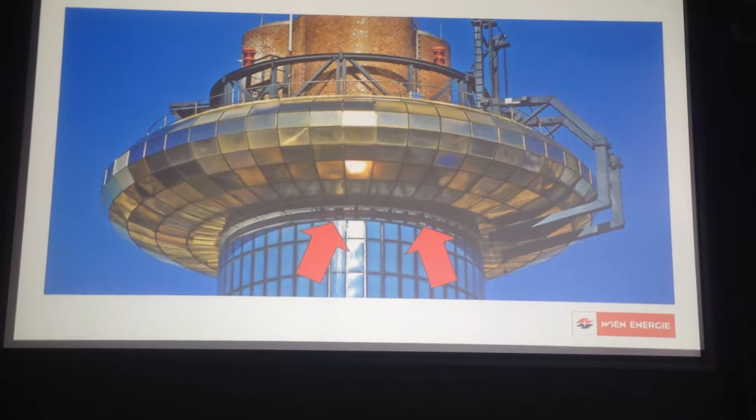We created new buildings, and Hundertwasser told us falcons need red tiles to be happy. Okay, we brought them red tiles to the places where they live. Every year we have one pair of falcons, normally 3 eggs, and also normally 3 young birds.

These falcons are shy birds, and on the days when the trucks are here and it's a little bit louder, they hate it. But early in the morning or late in the afternoon, you can see them flying around our chimney. This picture we took years ago, and one of these 3 birds was very interested in our plant.

He found an open window and flew directly into the plant, looking around at what we're doing, but then he had a problem - he couldn't find the way out. My colleagues working in the plant found the bird and called us: please come over to the plant, take a camera with you, there's a crazy bird in here.

I asked him, crazy bird? Is my boss with you? Not this crazy bird, it's a real crazy bird. It looks like an eagle, but it's too small for eating. We thought they were joking, but we went over to the plant and we found the bird too.

We took some pictures, and then we thought about how to bring the bird out of the plant. He's not allowed to stay in the plant without a helmet, and such a small helmet we didn't have.

A colleague of mine came to the situation, his name's Mr. Winkler, and he's a very brave colleague. He put a leather glove on his hand and brought his hand to the falcon, and the falcon jumped on his hand. I think it's the only falcon in the world which goes with Mr. Winkler to the elevator, and he brings him again up to the roof.

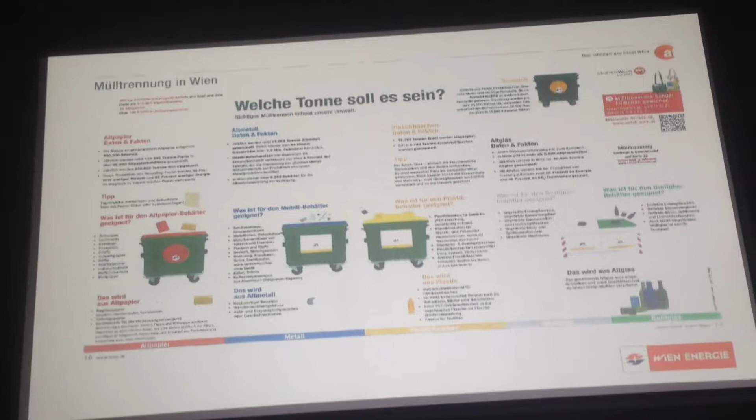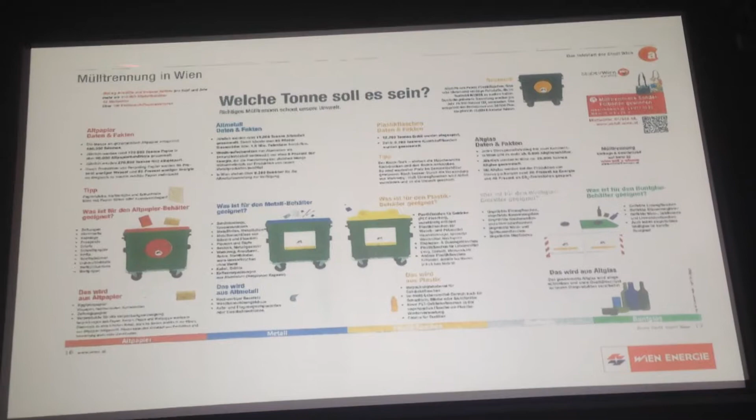Here is the waste separation in Vienna, Mülltrennung. And we also have the so-called Mistplätze. These are very important if you have larger pieces of waste, like an old bathroom or old refrigerator, but also hazardous wastes from households you can bring to these places.

And then we have the third step of waste management in Vienna, and this is what we are doing here: the burning of waste.

This is a view of the place before the bunker, and here you can see a lot of trucks. They're coming Monday to Friday. If there's a holiday, they also have to come on Saturday - up to 220 waste trucks, coming twice a day. First in the morning they wait here, then we open up our 8 doors to drive to the bunker, with 6 tons per truck going to the bunker.

Then they drive again to the city, looking for some fresh waste, coming in the afternoon a second time. The waste is in the bunker. We are going to see this bunker in some minutes.

And now my colleagues, the crane operators, have to do their duty, and they have 3 important things to do. First, they have to bring the waste from the side where it comes from the trucks, with their clamshells, to the other side. Then they have to mix up the waste, and then they have to look for some larger pieces and put them out.

You cannot imagine what we found in here in the bunker. For example, half a cow. But this wasn't the largest thing. The largest thing we ever found in here was a whole VW Beetle. It did not come with a truck - it's too big for a truck.

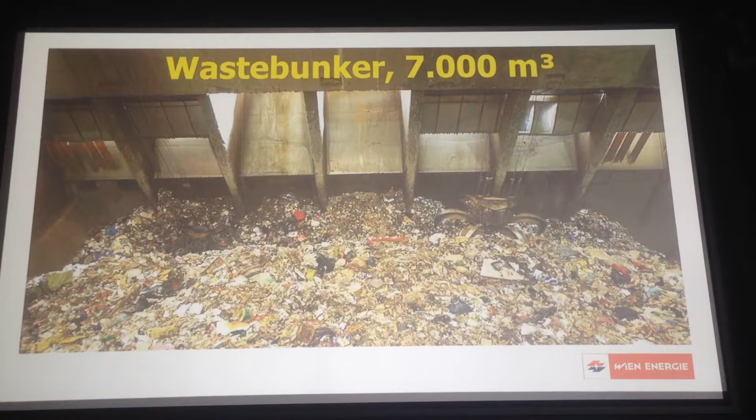But we have many big companies in our city. They have a lot of waste and buy big containers. The women who clean the office buildings throw the waste bags into the containers. Nobody knew that under the waste bags was a whole car - rather big. But this was the largest thing we ever found in here, and we've burned waste here since the year 1971 - 47 years.

The third thing he has to do: he has to fill up the filling hoppers. Every 10 to 15 minutes he brings up to 3 tons of waste with the clamshell into one of the two filling hoppers. Here we can see the whole system.

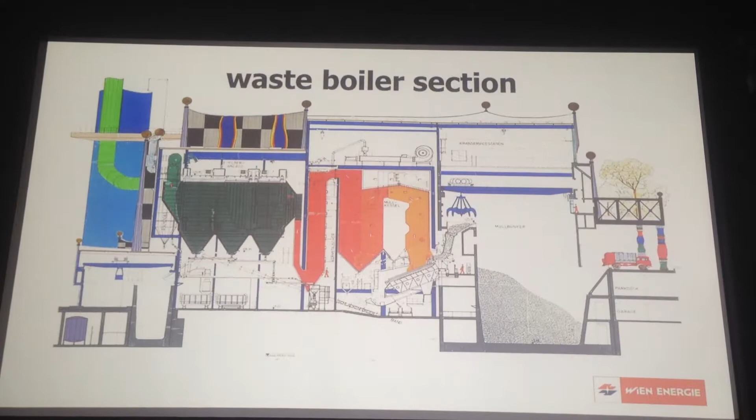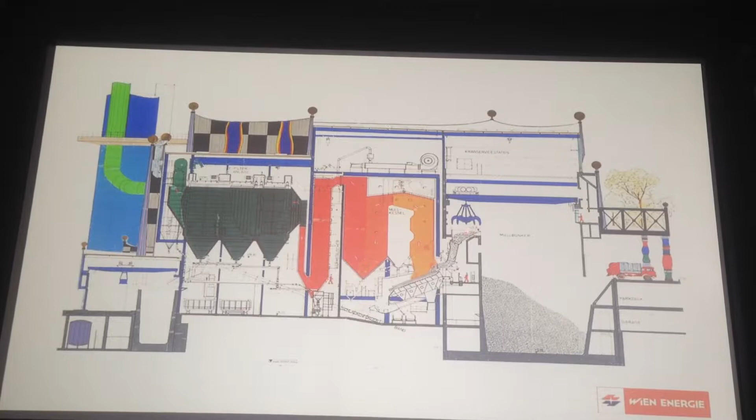The trucks are stopping here. Here is a border of concrete, so they cannot fill in past it. They bring the waste here in the bunker. The crane operator comes with the clamshell, brings it from this side to the other side. It's going to mix it up, looking for some larger pieces, and then fill up the feeding hopper. From this place, it goes very, very slowly to the grate.

The grate is as big as the seats here, and here we are going to burn the waste at a temperature of about 850 to a maximum of 1,200 degrees Celsius. It's not necessary to add things like gas or oil, but we need air - we have to blow some air under the flames to let them rise.

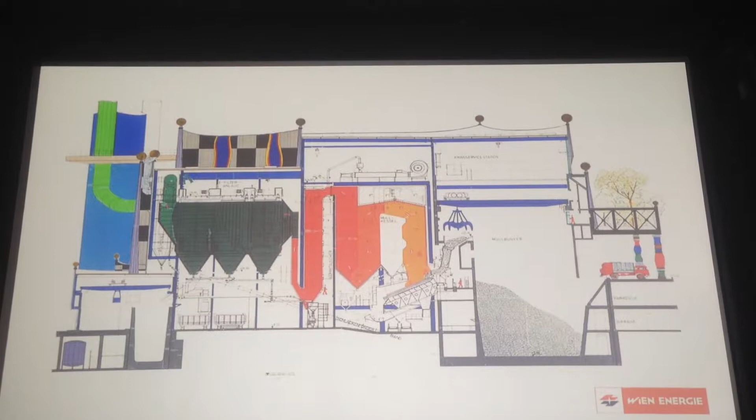And we took this air from the bunker. Why from the bunker? Because the air in here is dirty. If waste sits here up to 2 weeks before we burn it - maybe 1-2 weeks in the bin in the flat, maybe 1-2 weeks in the bin in the house, it might be 5-6 weeks total - it doesn't smell very good.

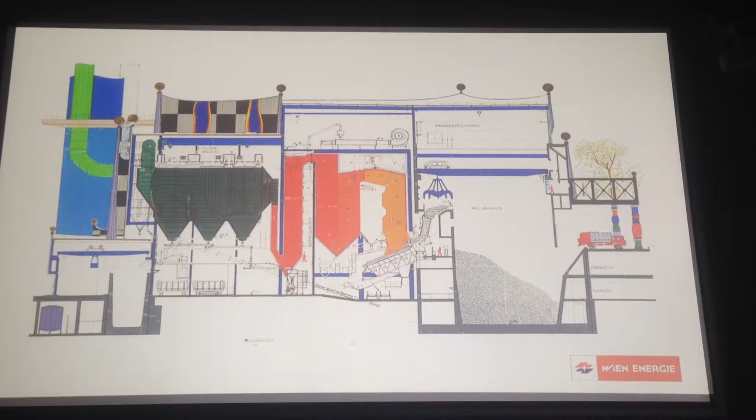And our plant is directly in the center of Vienna, with thousands of people living, working, and studying around us, so we have to work very clean. We bring this dirty air out of the bunker, blow it under the flames to let them rise, and then we can clean this dirty air with our flue gas cleaner. We also close the doors of the bunker when there are no more trucks coming, so that no dirty air escapes.

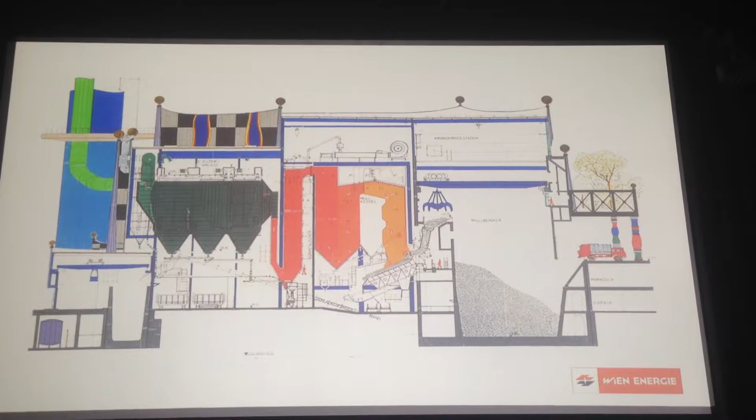The next step is the flue gas cleaning, but I will show you that over there in the plant. At the end of this short presentation, let's have a look at the district heating system in Vienna.

District heating is hot water, up to 150-degree hot water. We need this hot water for about 370,000 flats and about 7,000 bigger customers. We have a market share of about 36%, so more than a third of the Viennese people have district heating.

Where does it come from? It comes from Spittelau. We renewed our plant between 2012 and 2015. After 40 years of burning waste, it was necessary. At the end of the tour, we'll tell you something about this construction site. Now we are finished, and now we can burn again.

250,000 tons of waste per year. This is approximately a third of the Viennese household waste. Then we have here the old Flötzersteig, the oldest waste incineration plant in Austria. It's a little bit smaller, they burn about 200,000 tons per year.

Then we have here the Pfaffenau. It's about 9 years old, as big as our Spittelau. Beside another very important plant, the so-called Simmeringer Haide, where we burn hazardous waste from all over Austria.

In spring, summer, and autumn, this is enough energy. We have to shower hot and wash the dishes, but we don't have to heat. In winter, it's not enough energy. We have to heat our houses and flats, and we also turn on the bigger plants of Wien Energie, especially Simmering.

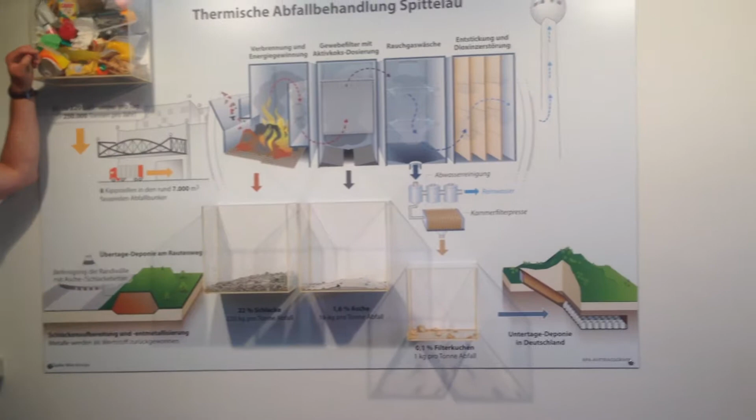Okay, group is complete? Yeah.

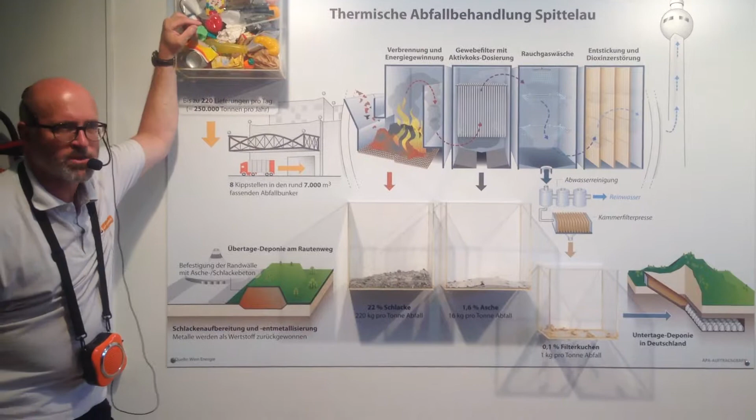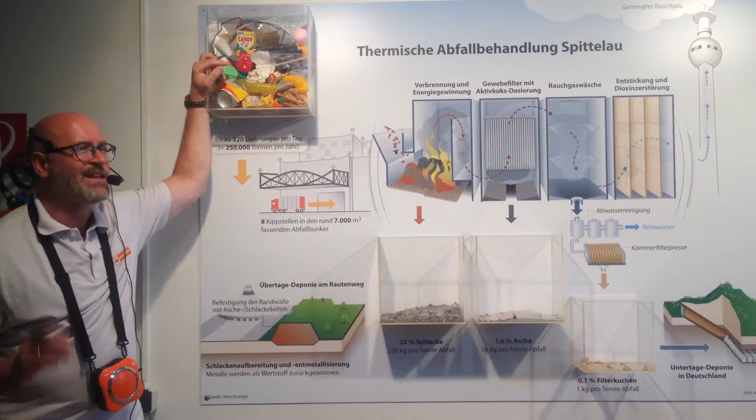This is the Viennese waste. Most people in Vienna separate their waste, but we also have some black sheep who don't do it - what a pity. Glass, metal, paper, and plastic bottles end up in household waste. We have no possibility here to separate it, and it's not our job - this is the job of the Viennese people to do.

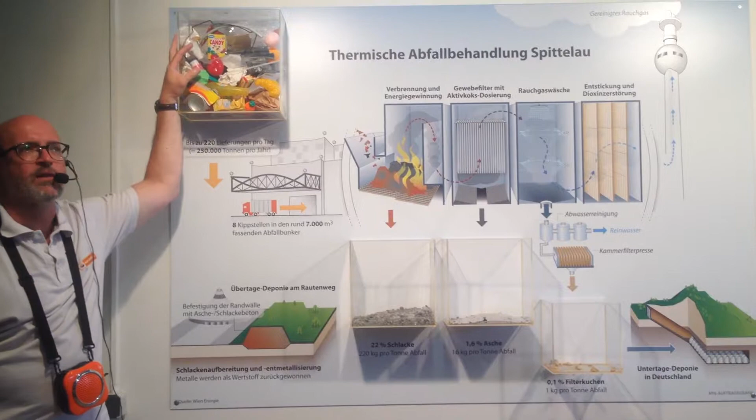And there is a lot of food in the waste. This is not a problem just in Vienna, this is a worldwide problem. Do you know that one third of the worldwide production of food goes to waste? One third - millions of tons! Oh my God, I cannot believe it.

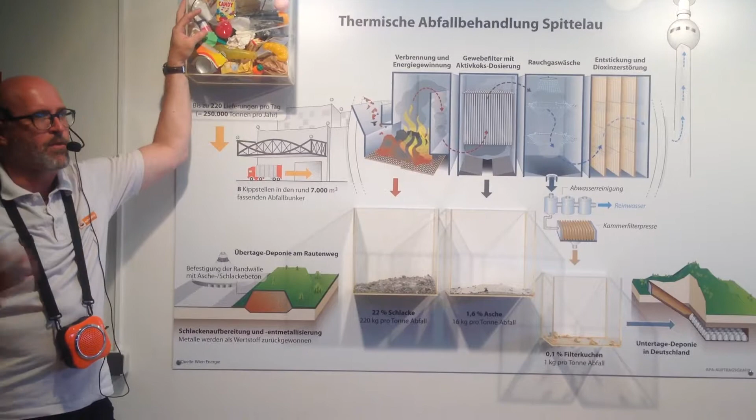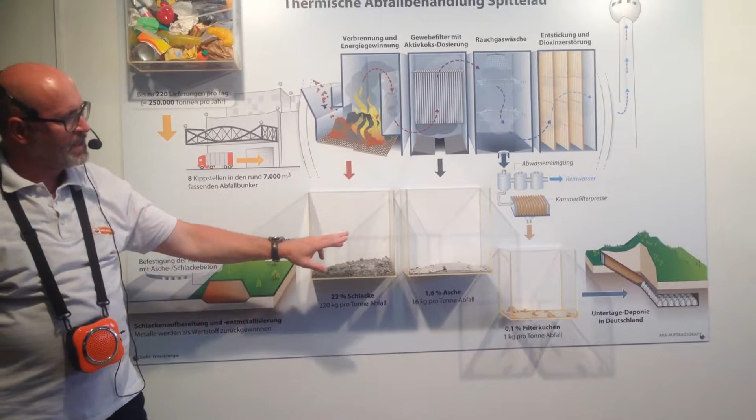The main reason for us to burn waste is to reduce its volume. We reduce it to about 10%. These three things remain from the burning of waste: the slag - here you can see some parts of glass, some metal parts, some parts of pipe. We cannot burn this.

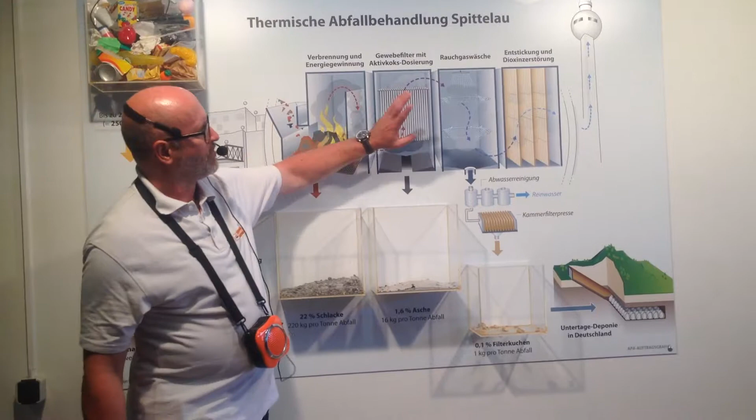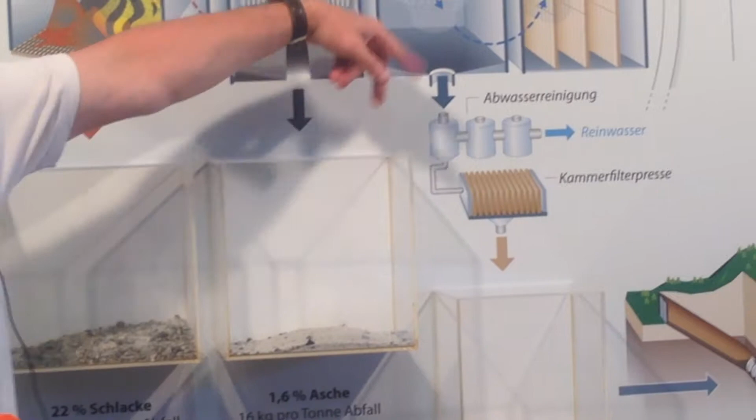Then we have the flue-gas cleaning in three steps. The first filter is a brand new filter, built in for the new boilers. It's a baghouse filter, brings out the ash. Then we have the wet flue-gas cleaning in two steps - you can compare it with a very, very big shower. We wash out the dirt from the flue-gas.

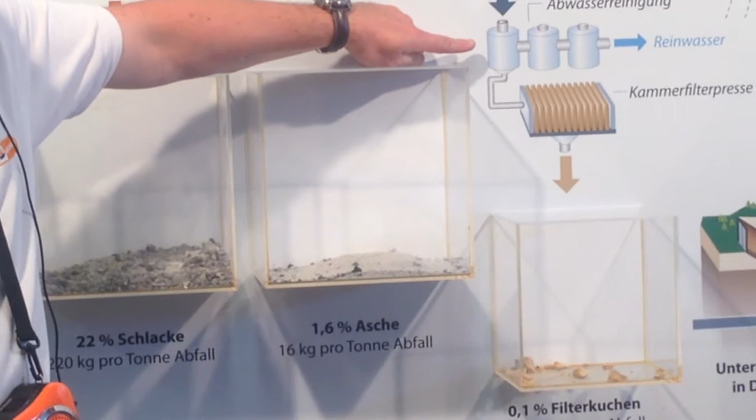So we have a lot of dirty water. We clean this water, and then we give it back cleaner to the Danube channel than when we took it, and then we have the so-called filter cake.

In September we start again with tours for children, and I tell the children, 'Children, this is a cake!' But we cannot eat it - it's very dangerous. It contains heavy metals like cadmium, like mercury and other things, and we have no place in Austria where we can bring it.

We have to bring it to our German friends. They have an old salt mine.

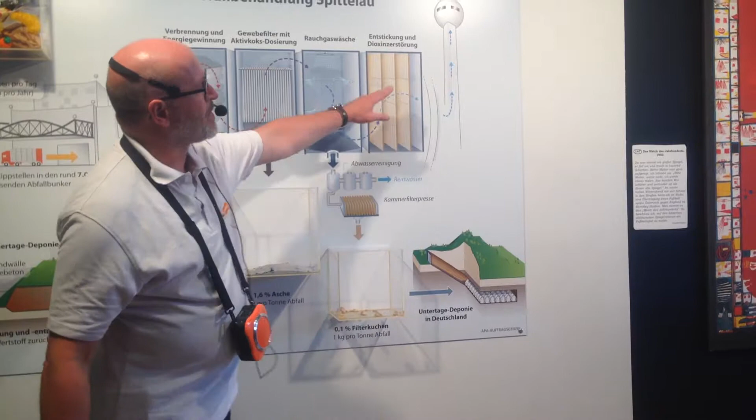There it is - the third filter is a so-called DeNOx filter. Here we can destroy the NOx gases. The NOx gases are produced if you drive a car or if you burn waste. We also can destroy the dioxins and furans.

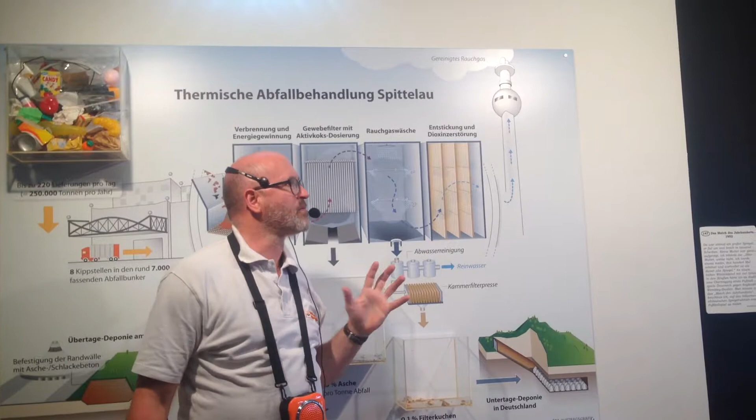This plant in Spittelau was the first plant in the whole world which could destroy the dioxins and furans, in the early 90s, up to 100%. We are very proud of this.

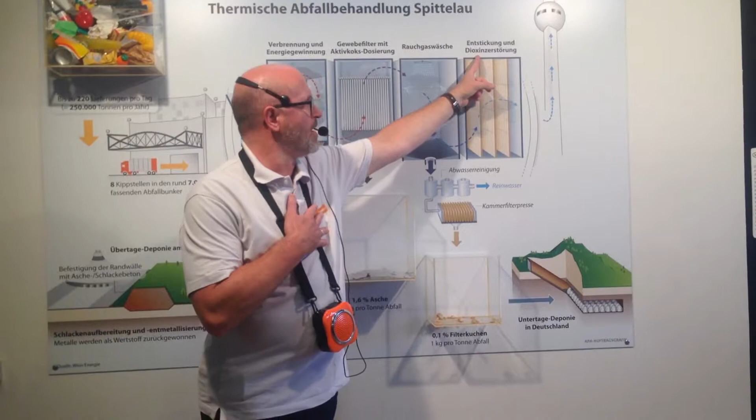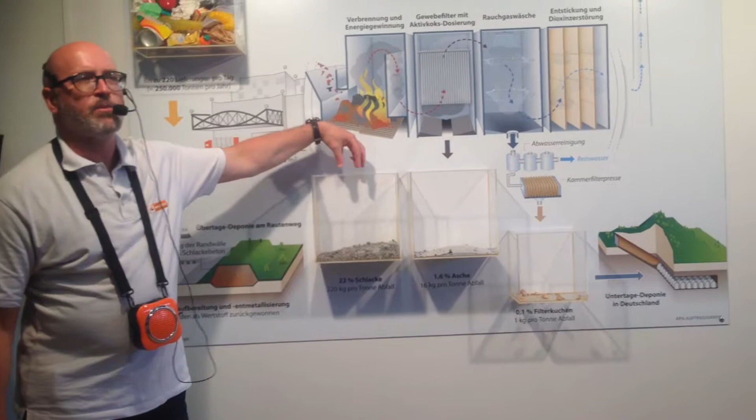The filter cake goes to Germany, but what happens to the slag and the ash? We give it back to the city of Vienna. With an electromagnet they pull out the iron metals, which they can sell, and then they mix the slag, ash, water, and cement.

It becomes the so-called slag concrete. This slag concrete goes to the landfill. We have a very hard law in Austria - we are not allowed to do other things with this material because it is classified as waste.

And we are not allowed, unlike our neighbors Germany, Switzerland, and France, to use it to build the underground of streets. Some months ago a delegation from the ministry was here, and they told me we will repair this law so that we also can use it for building the underground of streets.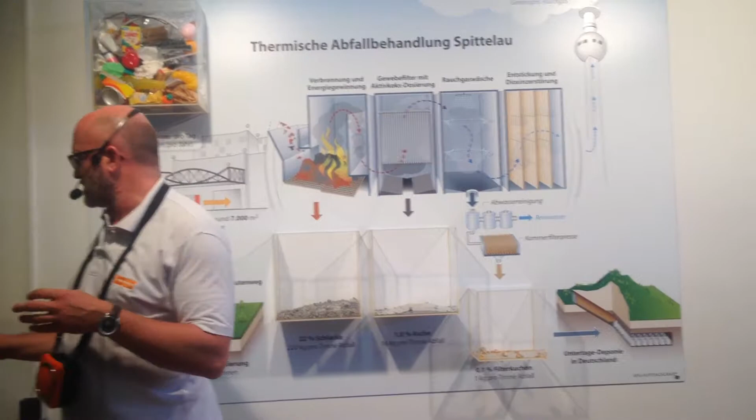Drinking a glass of water, he was a big saver of nature. I met him a very long time ago - I was a young student in 1984, and I met him personally.

But this is the wrong place to burn the waste - it should burn behind the wall in the two boilers. So we have to control its temperature.

And if we see it's too hot, he brings the waste with the clamshell and moves it to the other side. If there is a fire in here - but there's never been one - even the big fire in 1987 was behind the wall.

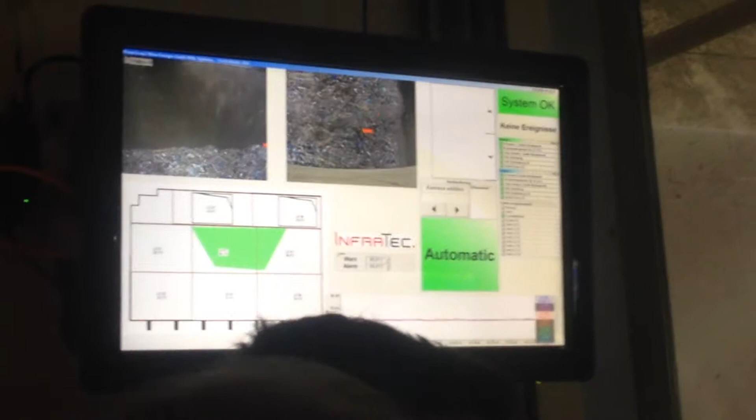We have two big foam cannons on the left and right side, and we can blow a lot of foam over the flames, but we've never used it, and I hope it will not be necessary. You can imagine if there is a fire in here, we would have a very big problem.

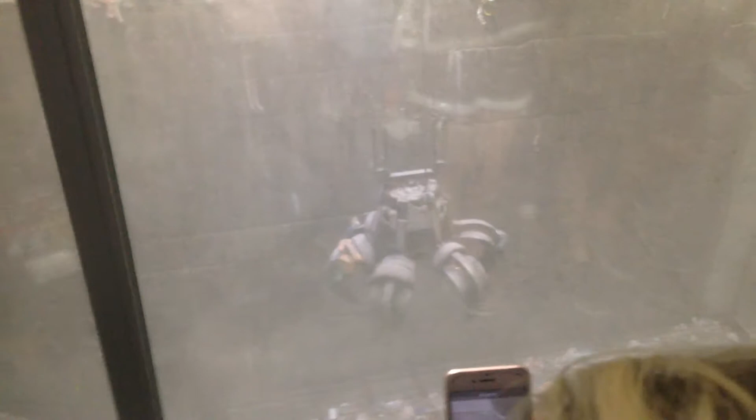The work here - my colleagues need a special driving license. It looks very simple with the joysticks, huh? But believe me, this is not simple.

Okay, if you have seen it, we go the same way back, please. Same way back.

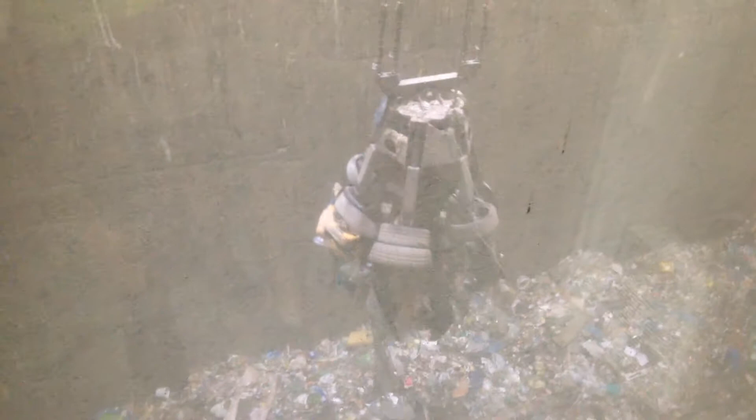He died much too early of cancer. For me, this is also a very important place, especially at the end of the week when I stand here with my last group and I'm a little bit tired from a lot of tours. Here I can recharge my batteries because there's a lot of energy in here.

District cooling, let's go over there, up to the black stairs. Come in - district cooling, this is the room of cooling. Oh, it's warm. Come a little bit more into the room, so that you can see this here.

We produce this out of the hot water of the heating plant, and it comes in behind you here in the back. This here is an old tunnel of the tram - the tram was here before we had the subway.

We bought this tunnel years ago, and then we had the idea to bring district cooling to the General Hospital, the biggest hospital in Austria. We remembered we had this tunnel, and it's perfect - it's about 140 meters long, because for district cooling you need a lot of space.

Here you can see some pictures of the construction site, and here you can also see an absorption chiller - one of our biggest machines, which we cannot bring in here directly. So we have to open the streets where the waste trucks come, bring the machines in, and then close this with special concrete elements which we can change quickly.

We have three possibilities to make district cooling. The first is with the absorption chiller and the hot water of the heating plant. The second is with a compression chiller, which works like a refrigerator and needs electrical energy, which we produce ourselves.

The third possibility I will show you over there. We are going now through two rooms, and in both rooms it's very loud. In the second room, on the right side, you can see the compression chiller - a very strong cooling machine with cooling power of 7 megawatts, but also very loud.

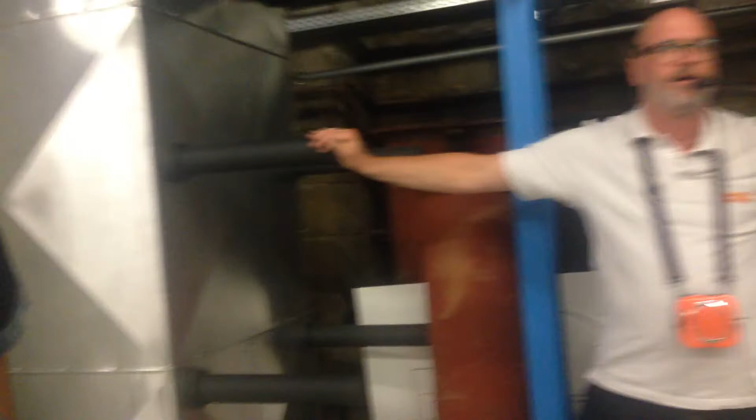But now to the third possibility to make district cooling, I can show you here over there. This is a so-called plate heat exchanger. We need this small but smart machine for the free cooling.

Free cooling works in winter, when we take the cold water from the Danube channel, which is not very far away, bring it in, and then we can cool in winter very, very cheaply.

Normally we have to heat our houses and flats in winter, but we have some special customers like laboratories or bigger companies with their own server rooms, and you have to cool the server rooms all year long. With this machine, it's a very cheap solution.

Last winter was a good winter for my company, especially February and March - it was very cold, and during that time we could also use this machine, because the water of the Danube channel must be very cold. Maybe next winter will also be a good winter, then we can use it again. I love it - it's a very simple machine, and it's also cheap to buy.

But now to one of our biggest machines - it's an absorption chiller.

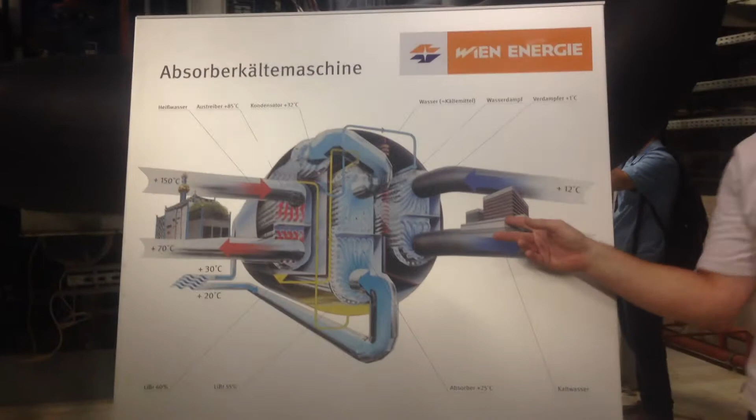These pipes are in operation the whole year long. In these pipes is the cold water which we bring to the customer. The main customer is the General Hospital, about 1.8 kilometers away from here.

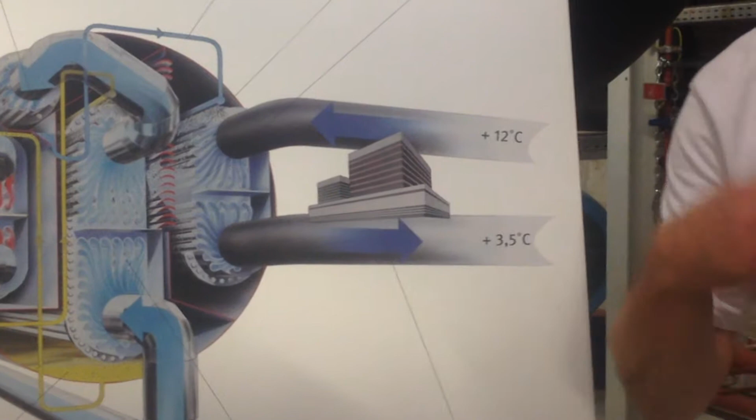We produce here very cold water, 3.5 degrees Celsius, and bring it to the hospital. In the hospital it has about 6-7 degrees Celsius. This is okay for acclimatization.

After the cooling process, the water is warmer. It comes back to us at 12 to 16 degrees. We have to recool it.

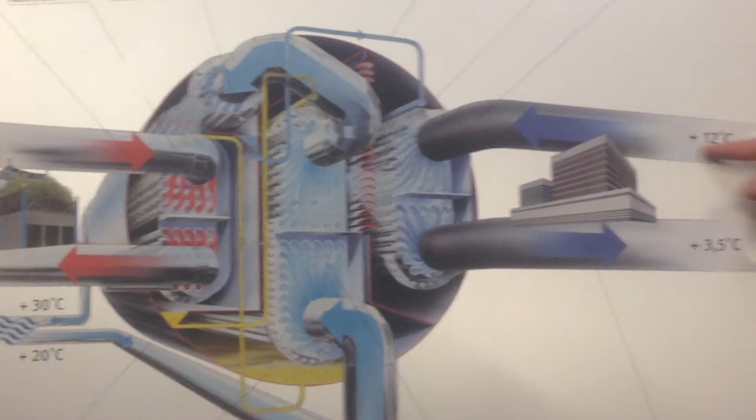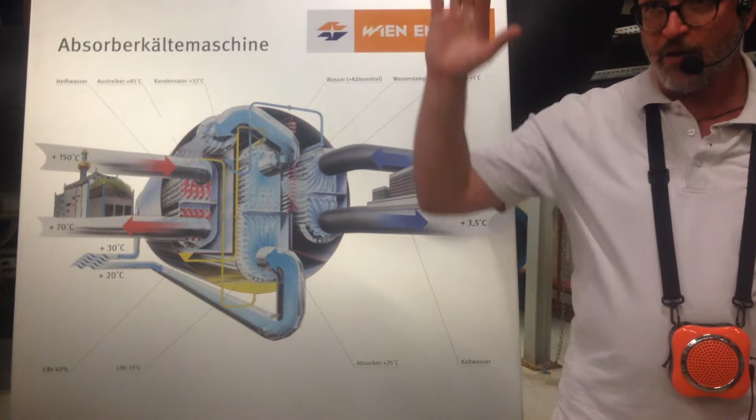How do we make it? You all know water with a temperature of 100 degrees Celsius begins to boil at normal pressure. But if we reduce the pressure to very low, 6 millibars, it begins to boil at 1 degree Celsius. So we can recool, but this circle is not stable.

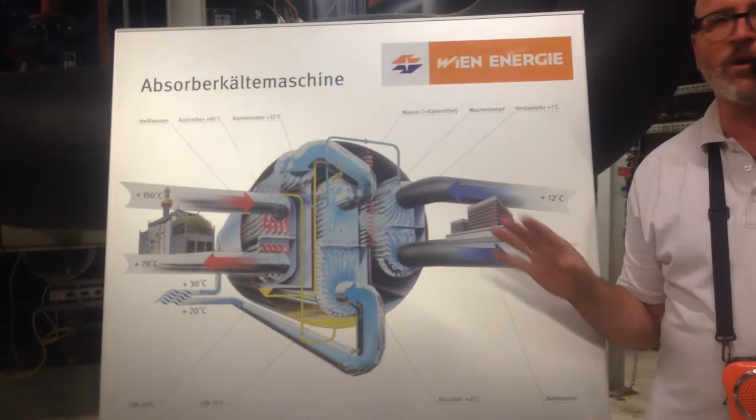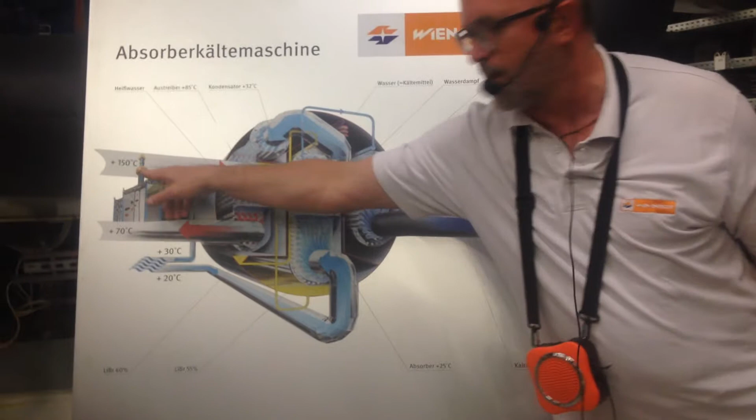It's like driving a car. If the fuel is empty, you have to bring energy in, fill it up. We also need energy, and we took this energy from the hot water of the heating plant, 150 degrees Celsius.

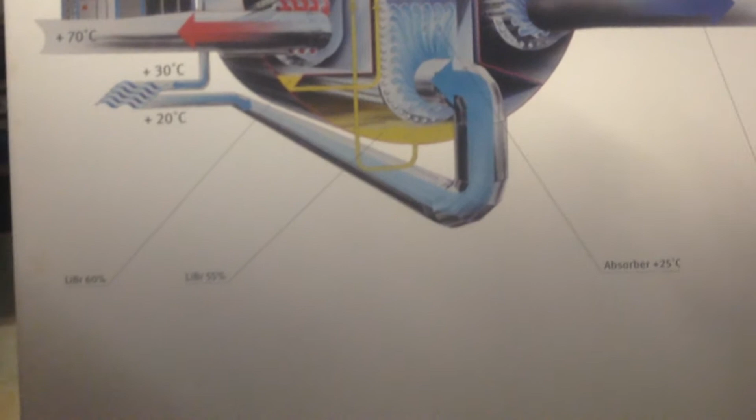We also need a little chemicals, not very much. This is lithium bromide, a salt. It works with the water, and we have two more circles that stabilize the main circle so we can always produce cold water.

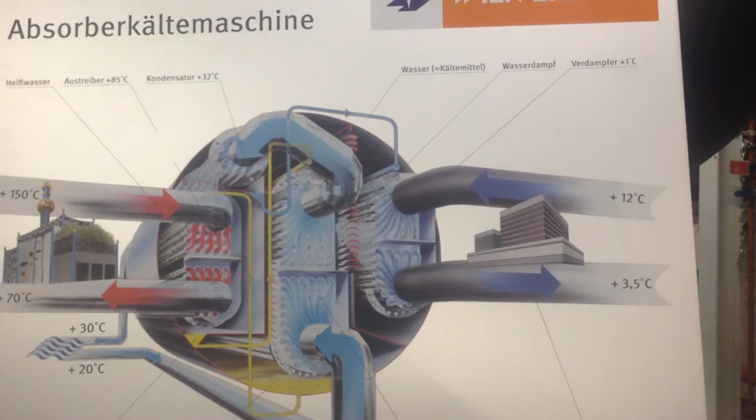This absorption chiller has a cooling power of 5 megawatts. There's another one standing behind, so we have 10 megawatts here, 17 megawatts outside. This is a middle-sized cooling plant.

You can see there's space left. We want to build in many more machines, and in 3 years we want to have the maximum capacity of 40 megawatts. This is one of the biggest cooling plants in all of Austria, because we believe the next summers will also be very hot, like this summer.

Okay, what we need now is money. This machine is cheap, but this one is very, very expensive.

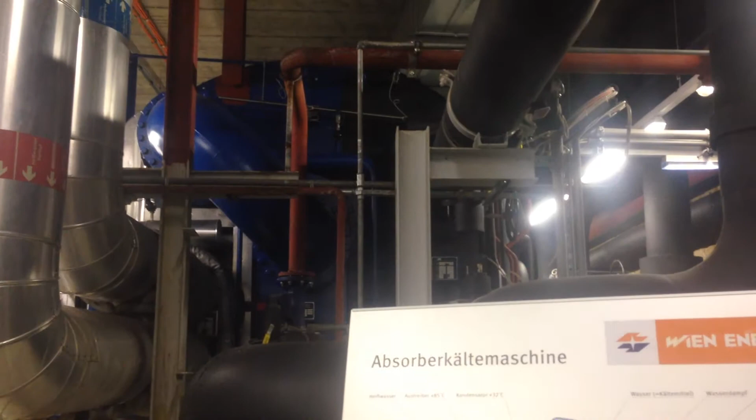We can also buy these machines if we have new customers. The boss of the cooling system here told me some weeks ago he has some new customers who signed the contract, so he bought a new machine, and in some months we'll also have the next compression chiller.

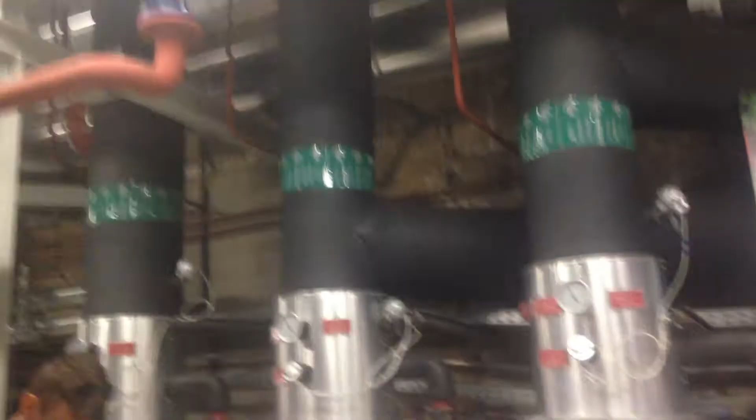So the technicians had a good idea. In this small red pipe here, we blow in some blue plastic foam balls to clean the machine. As I heard it before, I couldn't believe it.

My technician said, come next week, the machine is open, look into the heat exchanger there. Clean. This is a very simple and very cheap system to clean these big machines.

And over there is the station, I can show you.

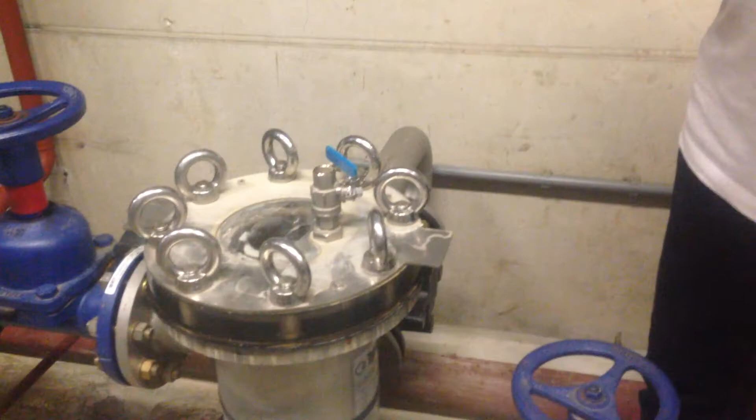We start the machine at the end of April, beginning of May. Then we have 2 bags of these balls. We bring them in, start the motor and the pumps, and they get carried into the machine. They clean the heat exchanger and come back after 10-15 minutes.

Here we can check their color. If the color is bright blue or gray, no problem, we don't have to do anything. Automatically they get brought back into the machine.

If they are dark gray, brown, or black, they are used up. We take them out - only a handful - and burn them, then bring in new balls, and we can clean again for about 3 months.

After 3 months you have to change them. Such a simple, cheap system. The founder of the idea is a German company, Taprogge. This system works in cooling machines all around the world. We need many more ideas like this for our planet.

I love it. I'll wait here just a minute so you can see it. We can hear it - it makes a pop, and then the balls come out. But mostly they come when I walk away, so I'll step away and you can stay here for a minute.